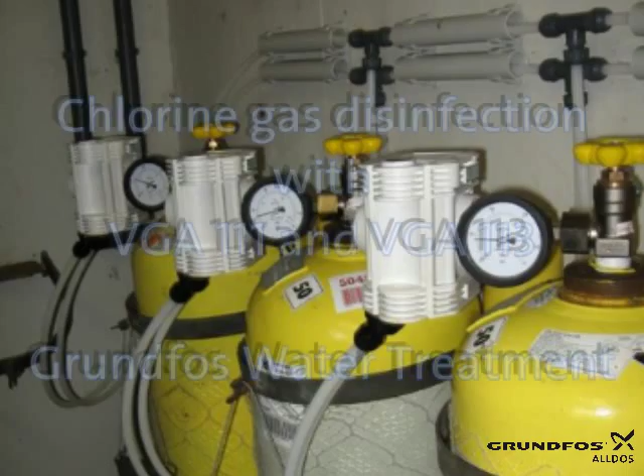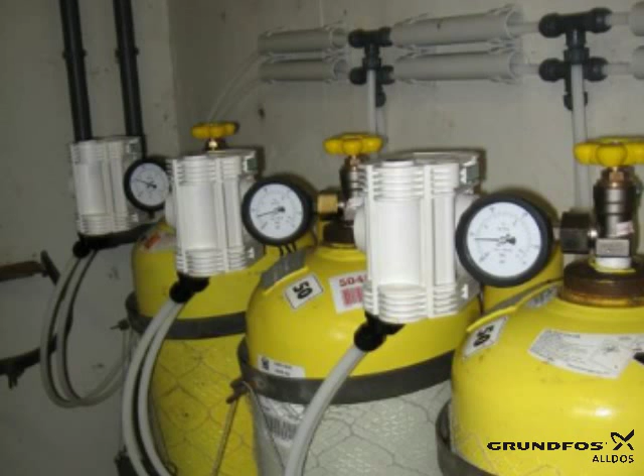We want to show you which products are necessary for a chlorine gas dosing station.

At first, you need chlorine gas. Chlorine gas is available in cylinders. The question is, how many cylinders do you need? One cylinder, two cylinders, or more?

The DIN 19606 defines the number of necessary chlorine gas cylinders. The maximum extraction of chlorine gas is 1% per hour of the content of the cylinder or drum. If you have 65 kg, you can extract 650 grams per hour. If you have 1 ton, you can extract 10 kg per hour.

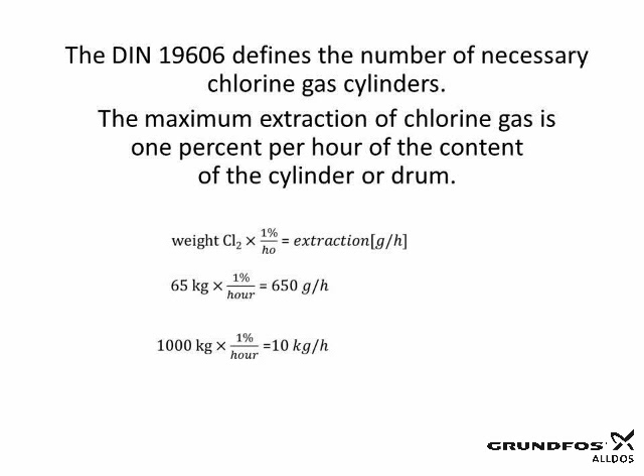To extract a higher amount, you must connect several chlorine gas cylinders.

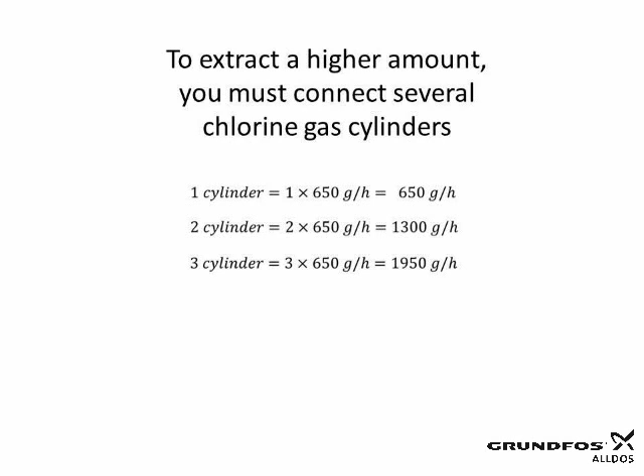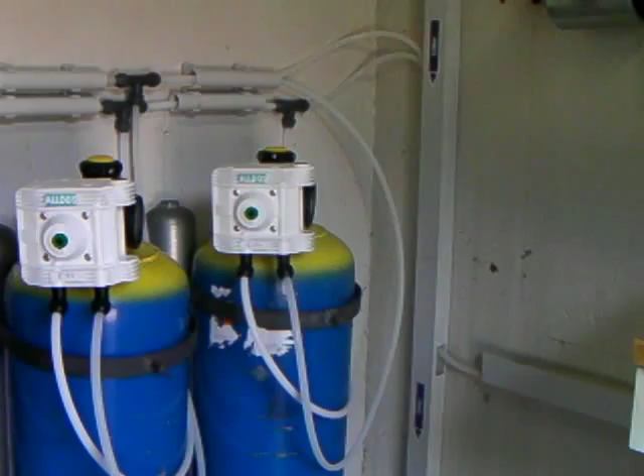To extract the chlorine gas, you need a connection to the system. For the connection of the chlorine gas cylinders, we use the vacuum regulator VGA 111. The vacuum regulator closes the cylinder when the cylinder valve is open. The VGA 111 is a security valve. It only opens when the chlorine is sucked out. I will explain later the security principle of our chlorine gas system.

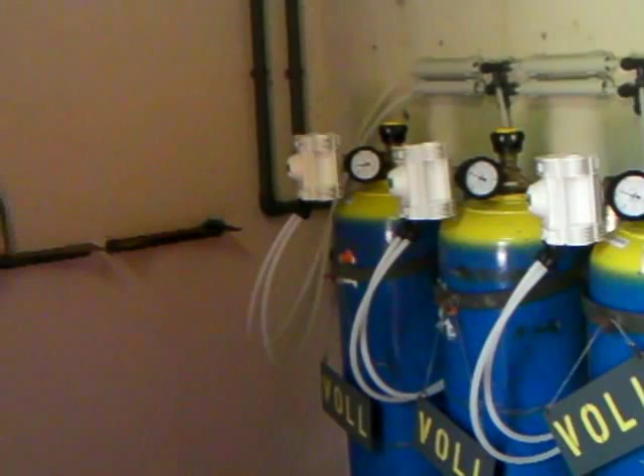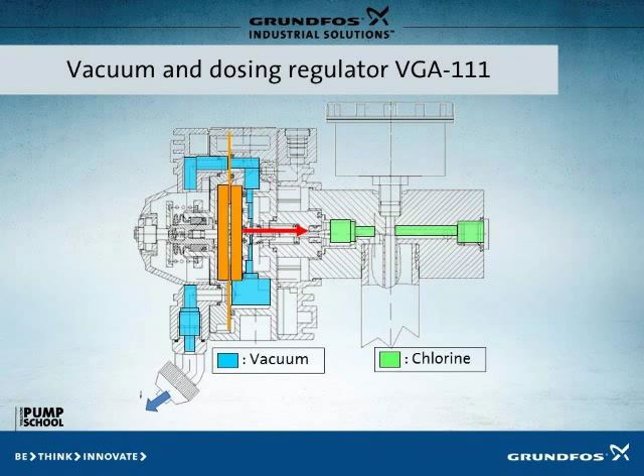Now you put the VGA 111 on the cylinder. In our example, we have 2 cylinders. What happens if the chlorine gas cylinders are empty? The chlorination stops. This is the reason why you need 2 additional cylinders, 2 in duty and 2 in standby.

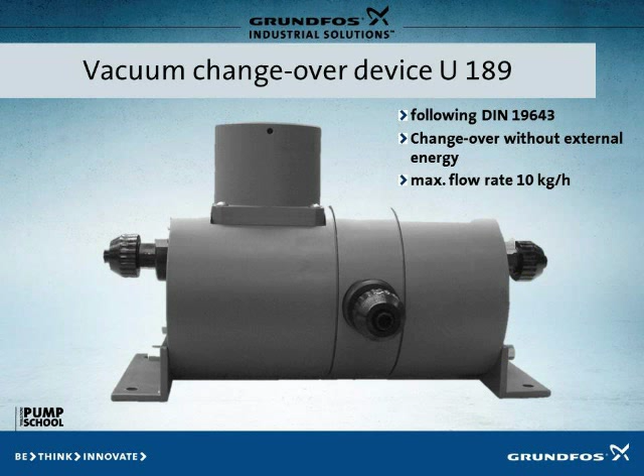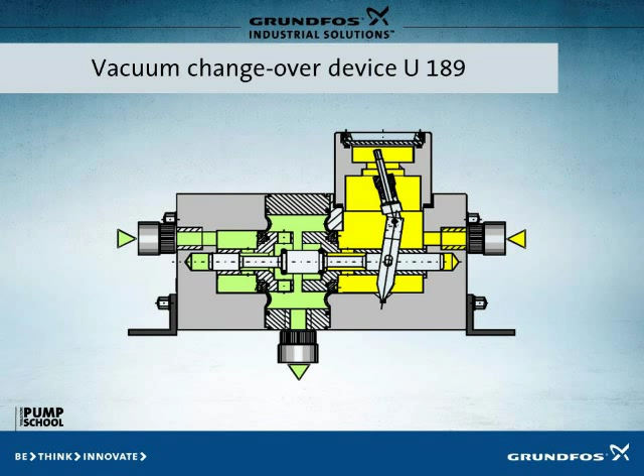To change between standby and operation, you can use the changeover device U189. The U189 doesn't need any electrical power and works in connection with the vacuum. If one side has been evacuated, it will change automatically to the full side.

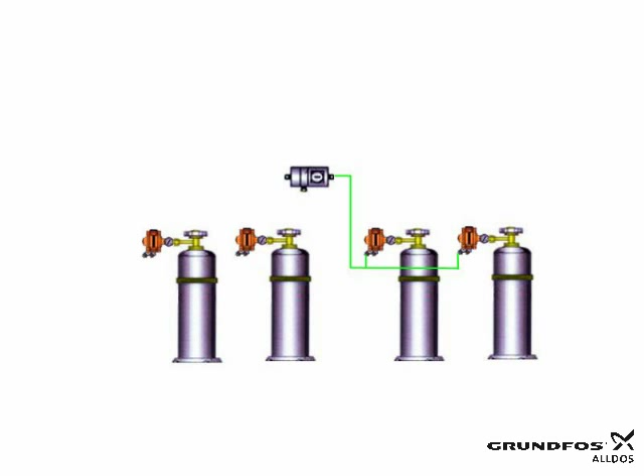The next step is to connect the vacuum regulator and the changeover device with the PE tubes. For the regulation of the chlorine gas amount, you can install the dosing regulator VGA 113, which is available in different sizes.

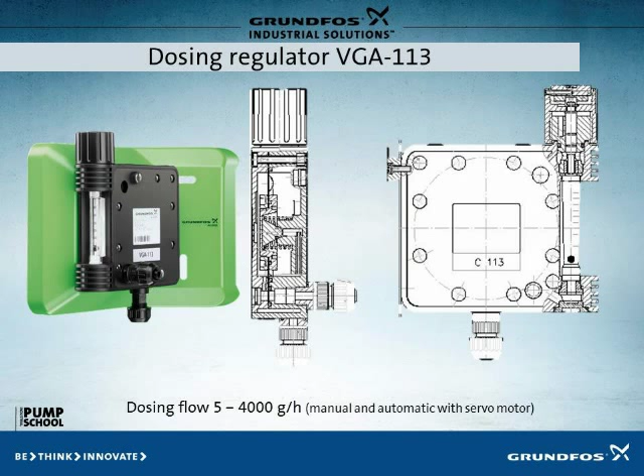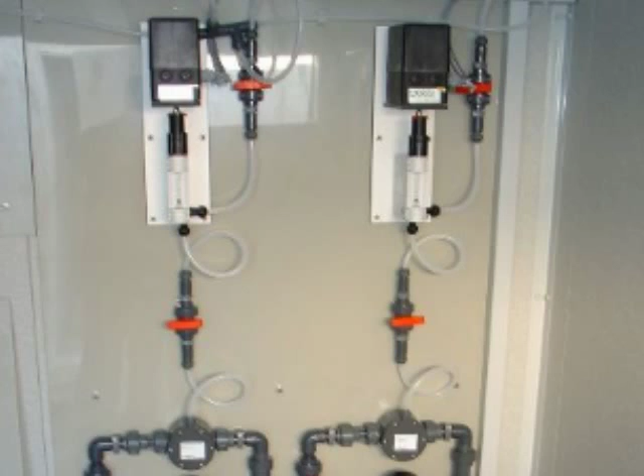With the dosing regulator, you can adjust the chlorine gas amount in grams per hour. The VGA 113 can be connected to a measurement and control system, for example, the Conex DIA-2Q via a servomotor.

For every chlorine gas injection point, you have to use a separate dosing regulator. The VGA 113 can be connected in parallel mode.

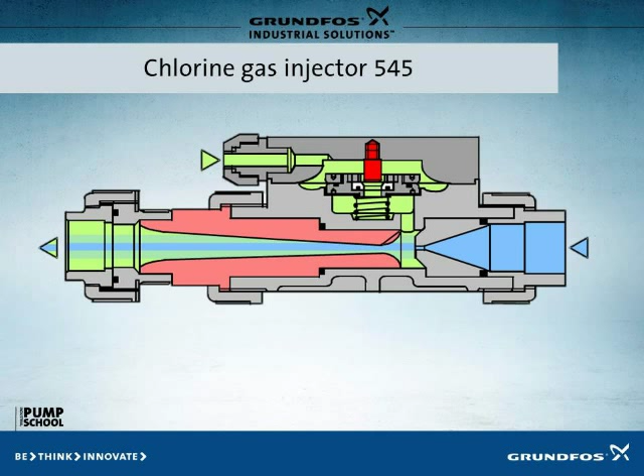The last component you need is the injector. The injector works according to the Venturi principle. With a high water flow, a vacuum is created. The vacuum sucks the chlorine gas in and mixes it with the water.

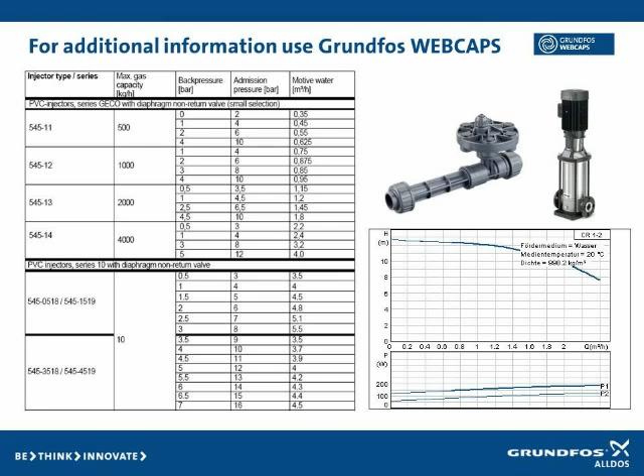The chlorine gas dosing system is now ready. The injector is installed in a bypass line and needs a high inlet pressure. For this, Grundfos offers a booster pump CRN. The dimensioning of the injector and the booster pump depends on the size of the dosing regulator.

You can find all product-related information on Grundfos WebCAPS.

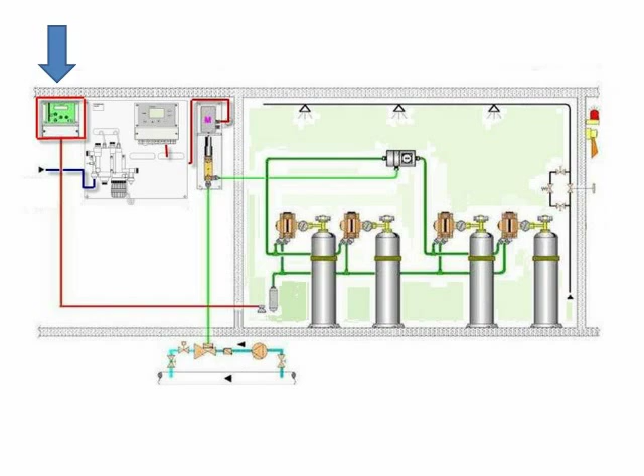The security principle of the DIN 19606 requires that all components with pressurized chlorine gas are installed in a separate room, the chlorine gas room. If chlorine gas leaks out, it will be contained in this special room. The gas warning device, the Conex DIA-G, informs the operator about the leakage and starts the sprinkler system or the air exhaust system.

The tube leading from the injector to the vacuum regulator VGA 111 has a vacuum. The chlorine is extracted from the chlorine gas cylinder. If there is any leakage, air is sucked in and the vacuum regulator closes the cylinder. If the bypass water flow stops, the vacuum will break down and the chlorine gas cylinder will be closed.

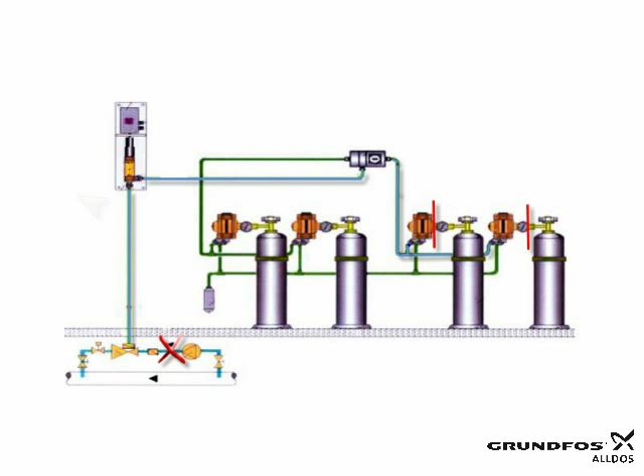The dosing regulator VGA 113 and the injector can be installed outside the chlorine gas room because all the components work with vacuum.

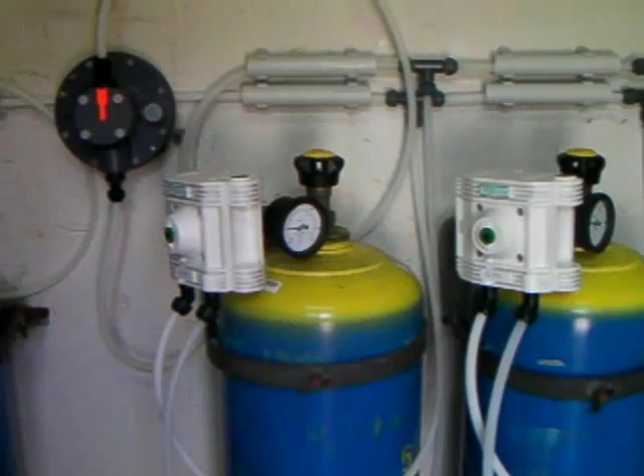Chlorine gas is used to treat drinking water. Thanks to its high safety standards, it's the most widely used disinfectant worldwide. It's a highly effective oxidant and disinfectant. Chlorine destroys nearly all microorganisms, even at low concentrations, which are harmless to humans.